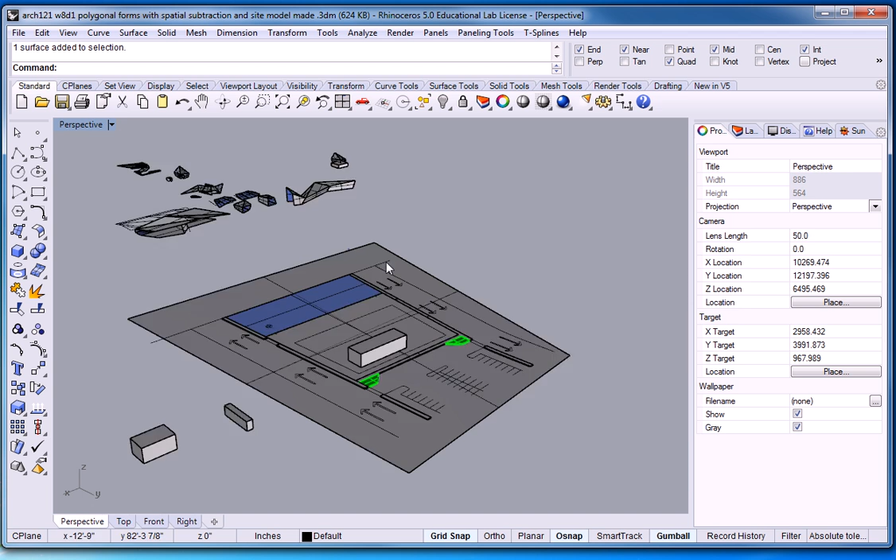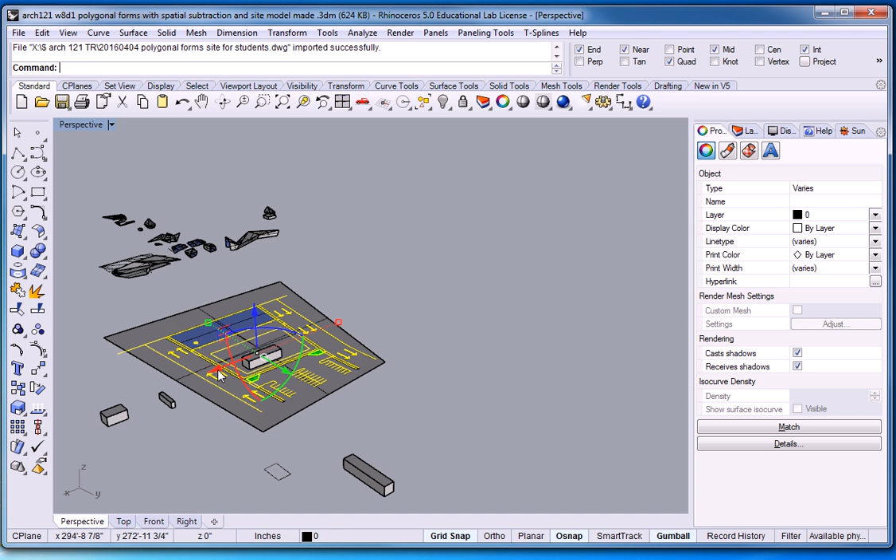So I'm going to click File, Import. And let me find this thing real quick. I believe I put it over here. Yep, there it is. So there's the site. It's already selected. So I'm going to move it back into here somewhere. All right, let me slide it back that way. I've got my grid snap turned on, so I know that I can move it evenly.

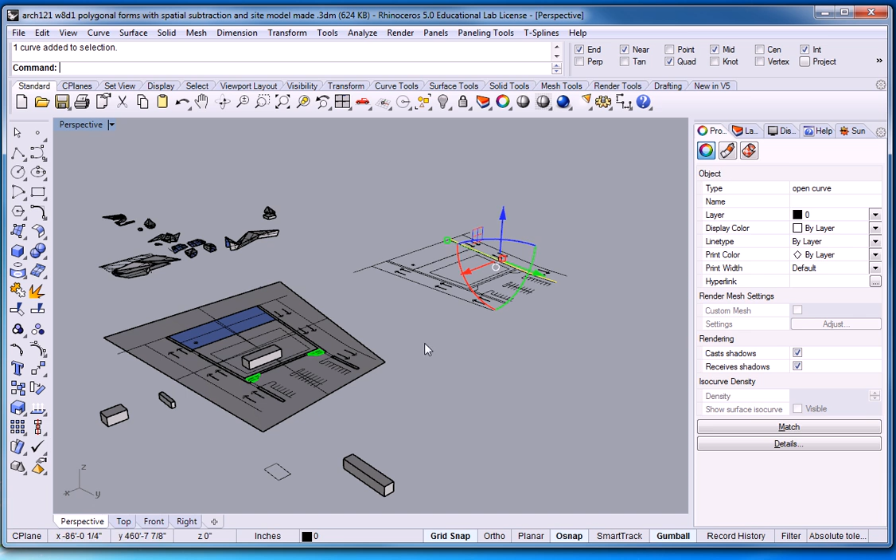One of the things that I wasn't real clear about the other day that I want to be clear about now is that all of this stuff right here is all going to end up on the zero layer. Unless there's some piece that wasn't on the zero layer when it was in AutoCAD, but I believe that everything in this thing should be on layer 0. And I could tell by highlighting it all and looking down here that it all is on layer 0.

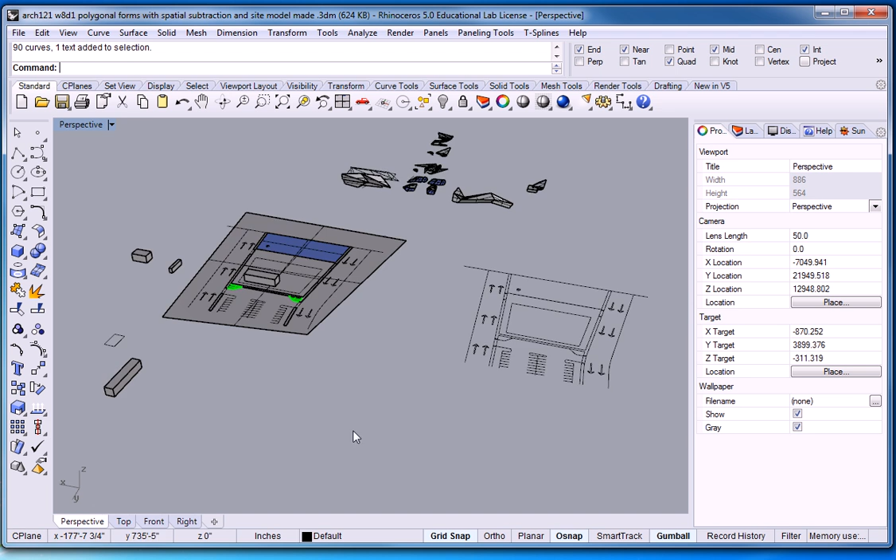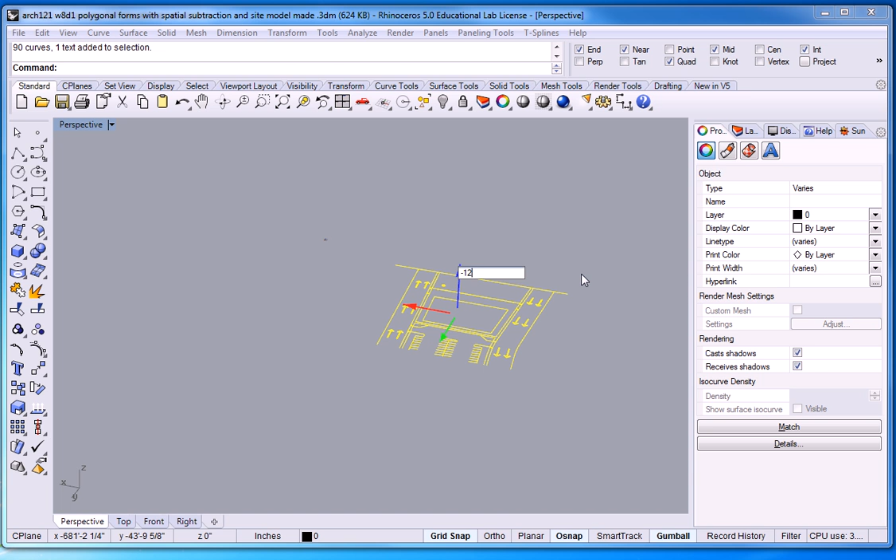So what I was mentioning to you is that the simplest way to do this might be to move it down a foot. So to clarify that, I'm going to hide all of this stuff, so we're just looking at that thing right there. So I'm going to select it all, click on that thing right there and say negative 12 inches or negative 1 foot, either one, and it moved down 1 foot.

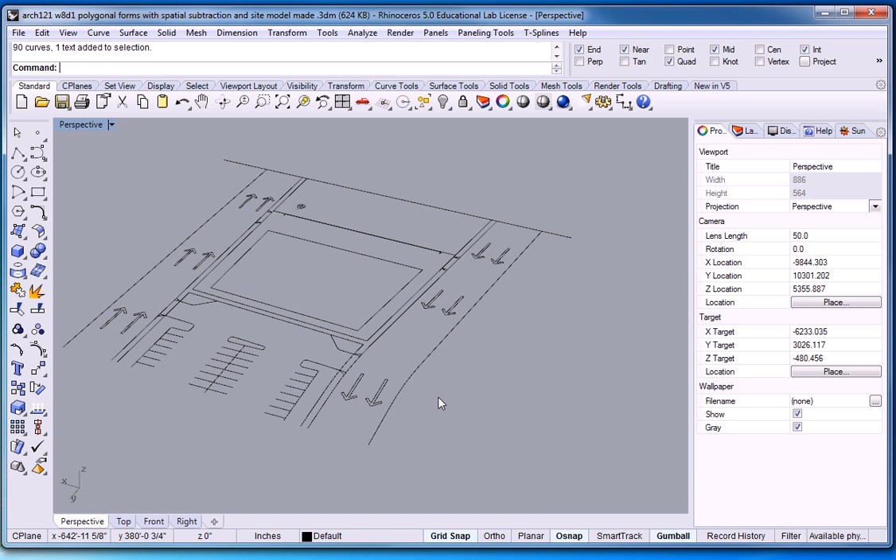Now, additional techniques that I wanted to cover for you on how to use geometry from another program, bring it into this program and use it, are going to include things like trying to use the actual line work. I walked in the back. Jonathan was having a hard time getting this curvature to work as an object. So here's one way that you might approach that.

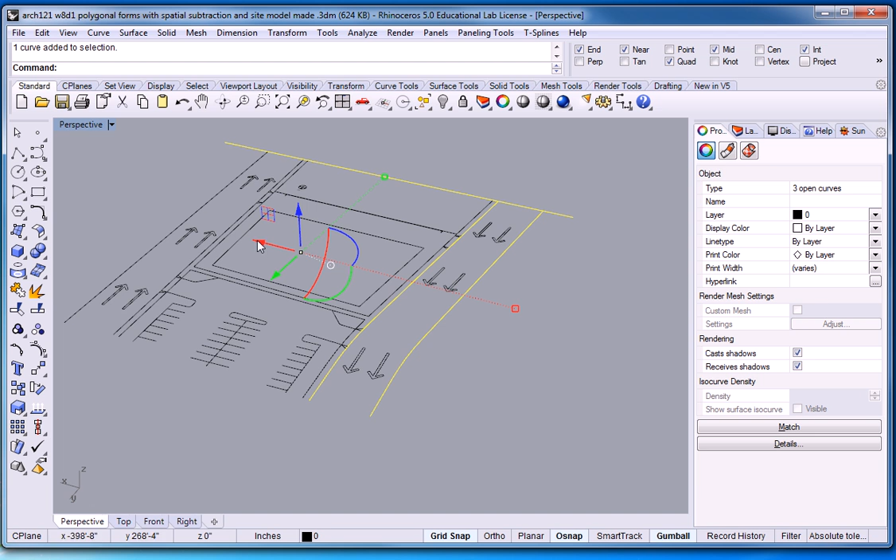You might try holding the Shift key and selecting the pieces that make up this perimeter. And then I'm going to actually just move it over a distance, and I don't know how far that's going to be, but I'm going to hold down the Alt key and click over here, and I'm going to type in negative 1,000 feet and see what happens. That might have been too far. Well, at any rate, I know that it's over 1,000, so if I do something there and I move it back, then I'm good to go, right?

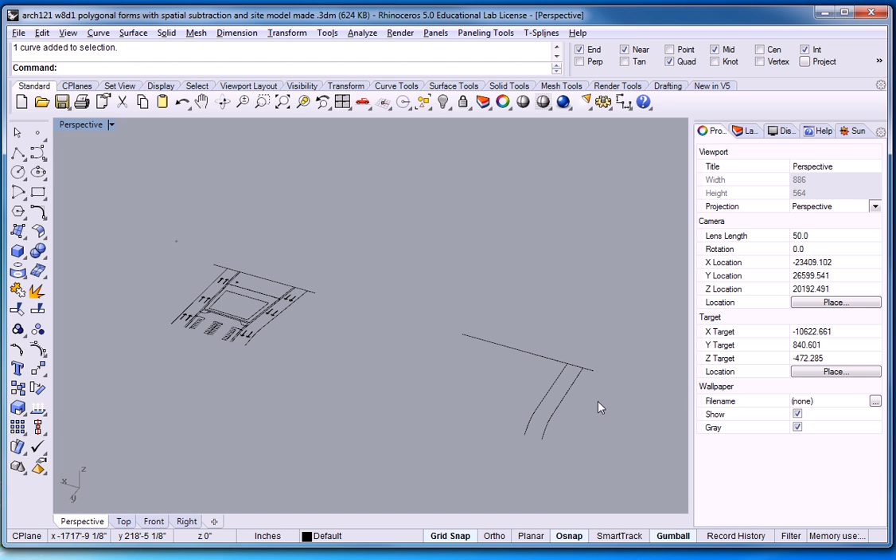All right, so what I'm going to do is trim up these lines right here so that they create a closed polygon. Okay, so let's give that a try. So trim that one and that one. Oops. So trim, select that one to cut with and that one to cut back to. Do the same thing on this side.

And now I've got to draw one line in here. So let me go ahead and create a line from the end point to the end point. Now I've got a closed perimeter there that I can make the street out of, right? So here goes. I'm going to join all of those.

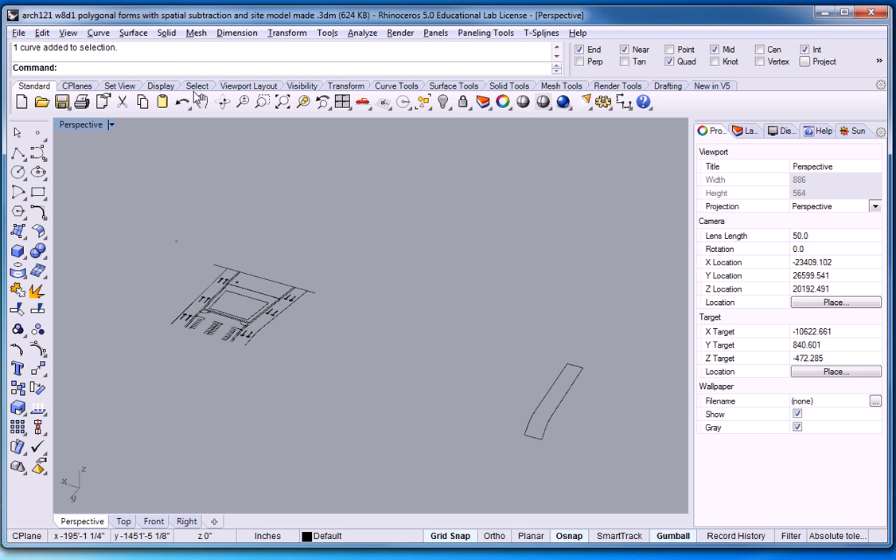So that's now one surface, and I can go up now as we did last class and go solid, solid, extrude, planar curve, straight. All right, press enter.

Now here's where the difference is. I've already taken this entire site and moved it down 1 foot. So I have to understand if something's going to go down or up. The streets are going to be 1 foot lower than the platform where I'm going to be working on my building. So if I go down... I'm going to make it real thick so you guys can see the difference. But I went down from there.

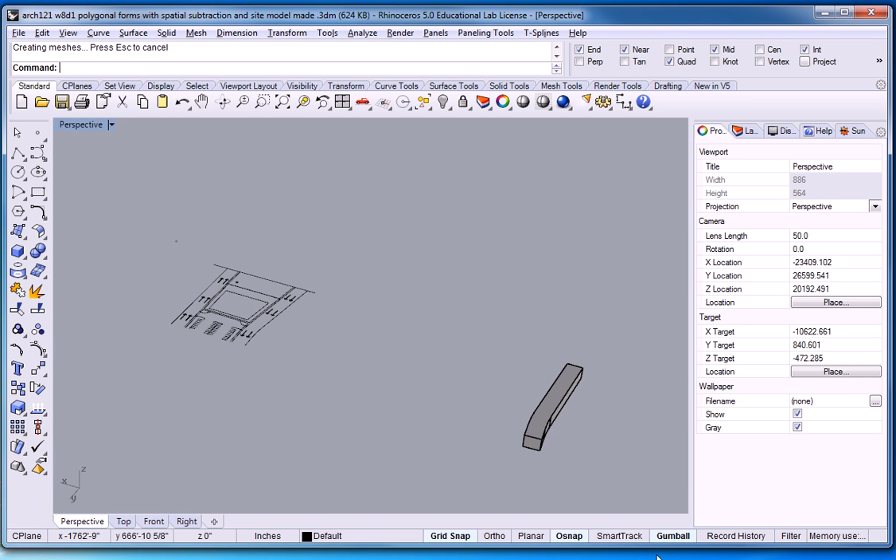So here's the question for all of you: in regards to the C-plane, where is this surface? Is it at the C-plane, above the C-plane, or below the C-plane? It's below the C-plane.

Okay, so the next thing that's really important, once you've created that stuff, you can delete the curves, we don't need it anymore, and take this object and put it on a layer. You've got to become disciplined about doing that type of stuff, otherwise you're going to end up with a mess that you can't control.

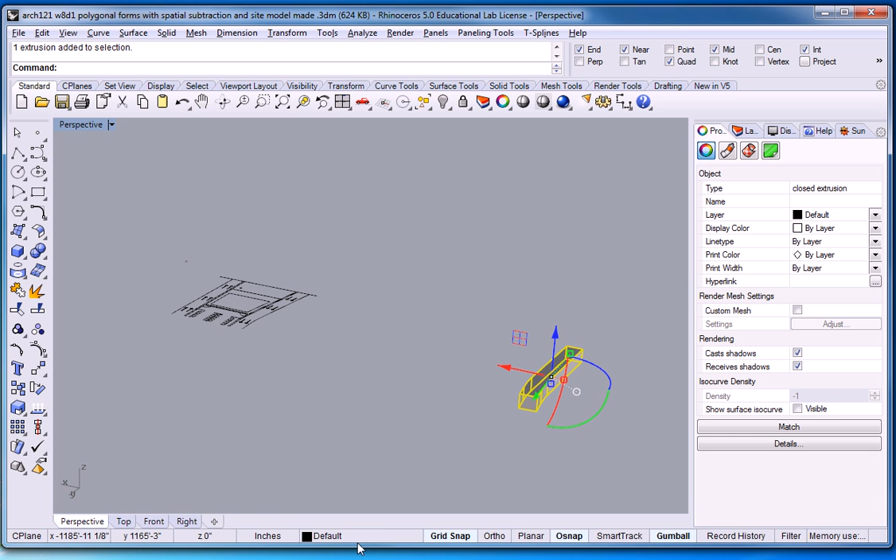So I'm going to come down here. I believe I have a layer for sidewalks and streets. And now that thing is on layer sidewalks and streets. I'm also going to change the color of it so that it becomes clear that it is different than the other things. So for now, I'm just going to make it blue or something.

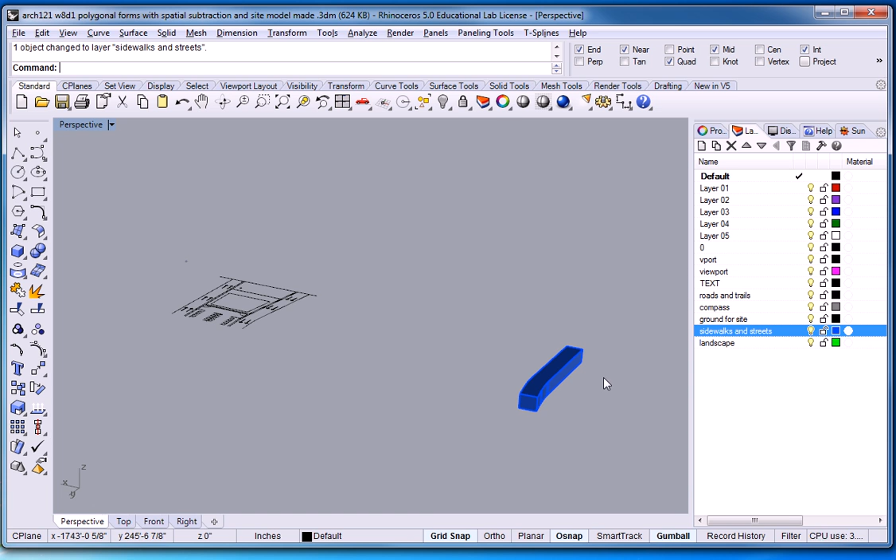So there is one of my big thick streets. But remember, the surface is down a foot. Okay, so I've got to do the other street, so I would do the same thing. The other street would go down. So I don't need to do that—you guys already know.

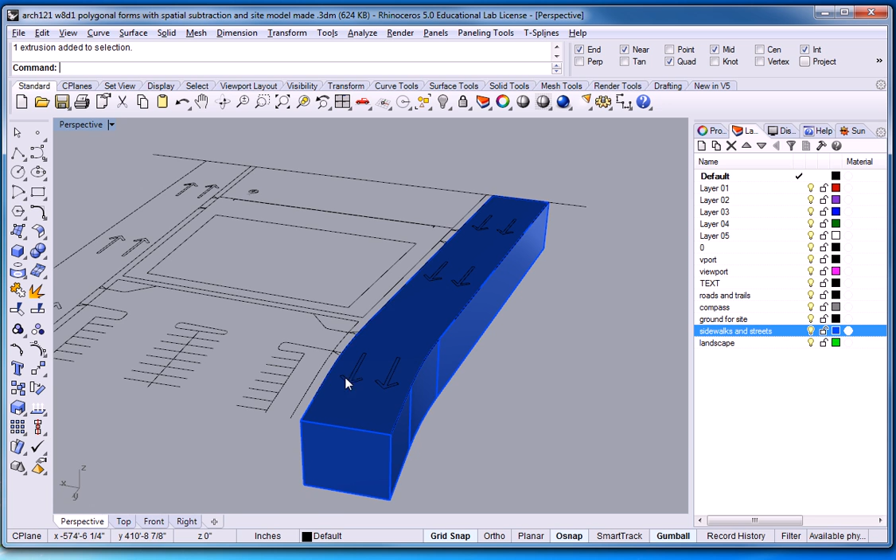So I'm going to take this and move it back 1,000 feet to where it's in the correct place. Right now, this is 1 foot down from the reference plane, from the surface, from the C-plane. The next thing I can do is take that thing and turn that layer off for right now.

Now I can start to grab more geometry from here and take it across and start to use it to extrude either upward or downward. Now, sidewalks—right now, all of this is 1 foot down from the reference plane.

So the sidewalks—when you guys are walking, like at your house, and you cross the street, you step off the curb down, walk across the street, and then step up onto the curb. So the curb, when I build these surfaces here, they're going to be up a foot. I'm going to make them 1 foot thick so that they come to the C-plane.

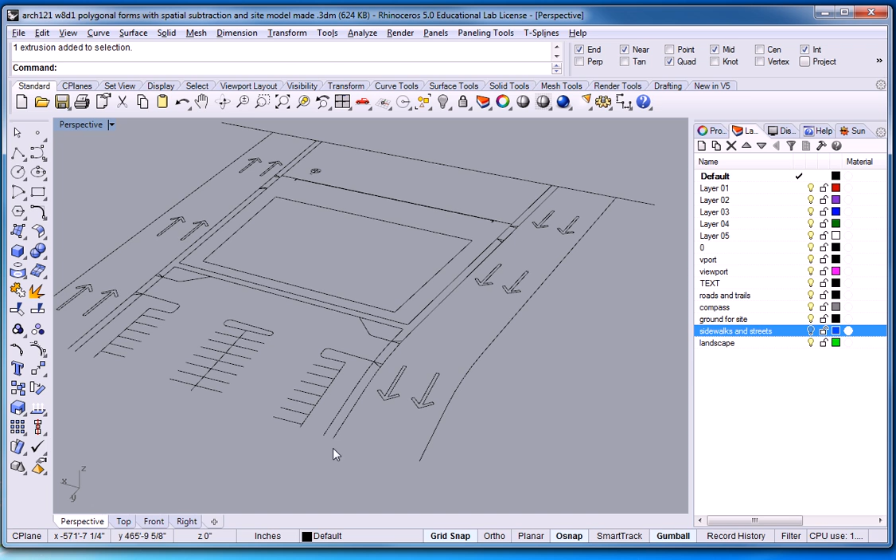Okay, so here goes. I'm going to, once again, hold down the Shift key, and I'm going to copy all of these pieces that I might need. And I'm going to do all the sidewalks at once. All right, click there.

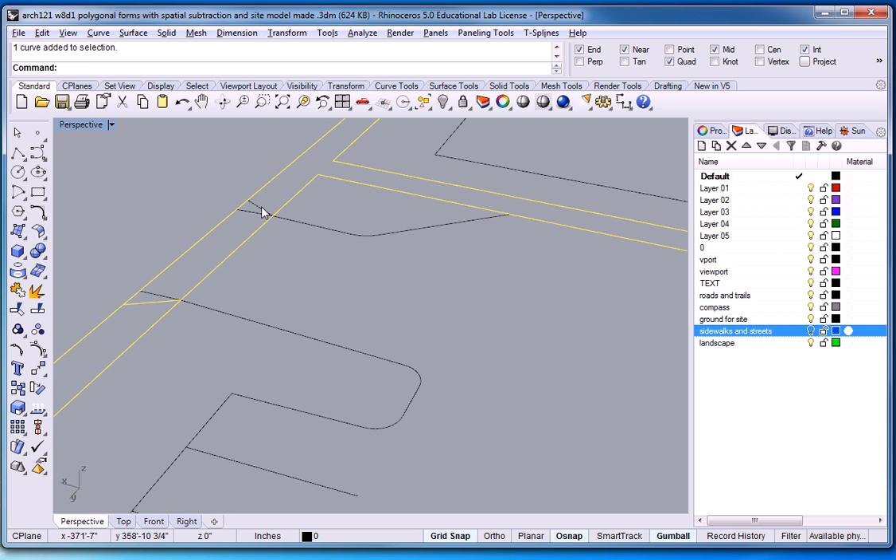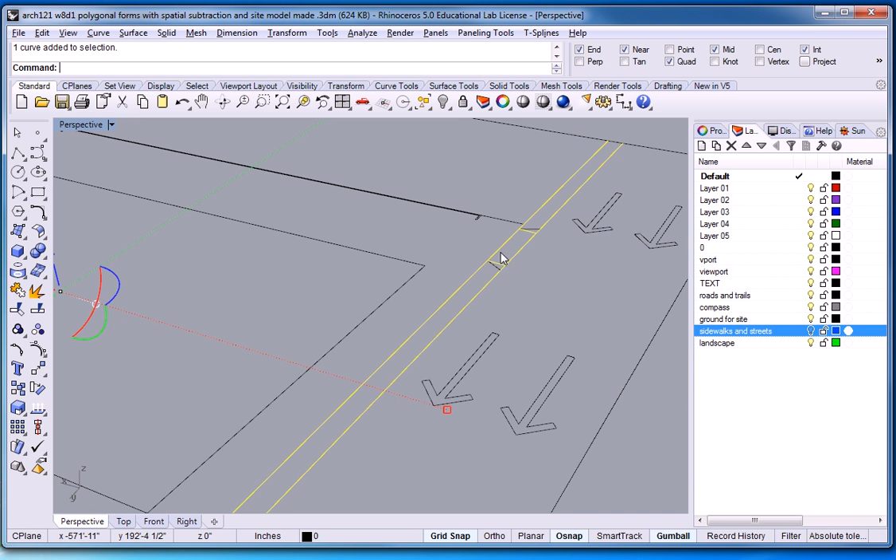Now, in addition to doing that, I'm also going to grab these pieces right here. I'm going to zoom in, and for these I'm going to grab the angled ones—actually, I'll grab the angled ones for all of them. I'm sorry, no, I won't. I'm just going to grab the angled ones here, and for these I'm going to grab the straight ones. You'll see why in just a moment.

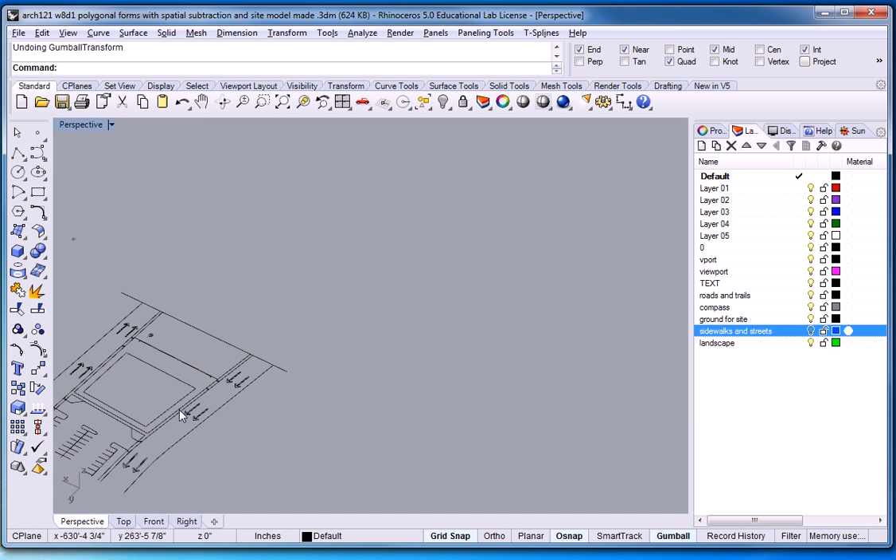So once again, I'm going to copy it over 1,000 feet. Oops, I didn't copy—Control Z. Hold down the Alt key and press that, type in 1,000 feet. Goes over. And now I have that geometry somewhere over here to work on. Oh, I went the wrong way—doesn't matter. So let's go ahead and clean up this geometry so that we can create a solid from it.

All right, I need to draw a couple lines. So I'm going to go from endpoint to endpoint. Another one from endpoint to endpoint. One over here.

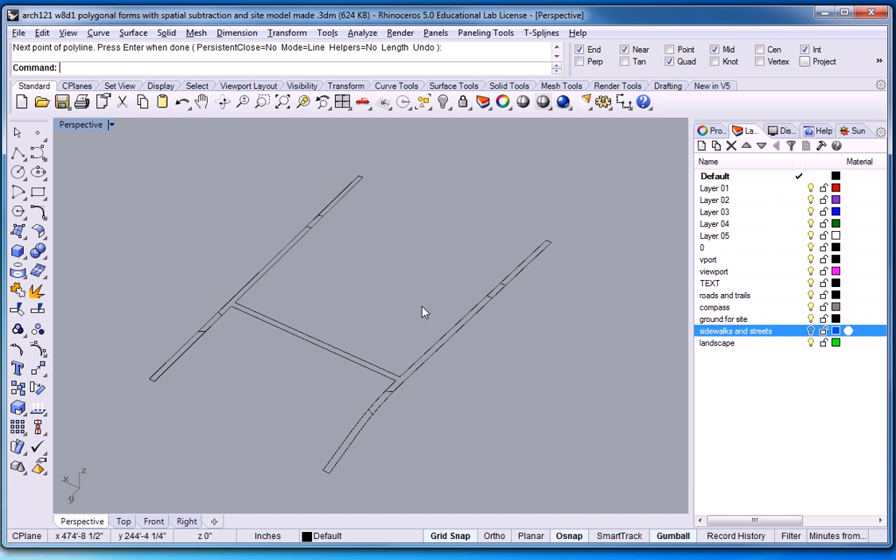So I don't want to build a solid here, or here, or here, or here. So I'm going to use the trim command and trim those lines out. Same thing over here.

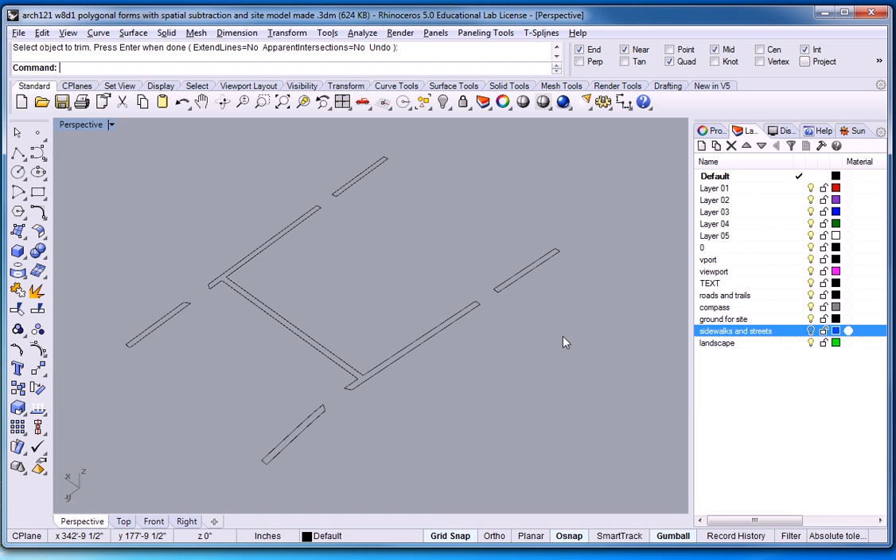So that is all of the pieces that I now need to extrude upward, 1 foot. Before I do, I'm going to try not joining them and see what happens with extrude planar curve. I think I'll end up getting a surface, but I'm not sure. Let me give it a try. I'm going to select all of this.

Come up here to surface or solid, extrude planar curve straight, and this time go up a foot. No, it's creating the entire thing. I think I am getting the top, but let me check. I don't know for sure.

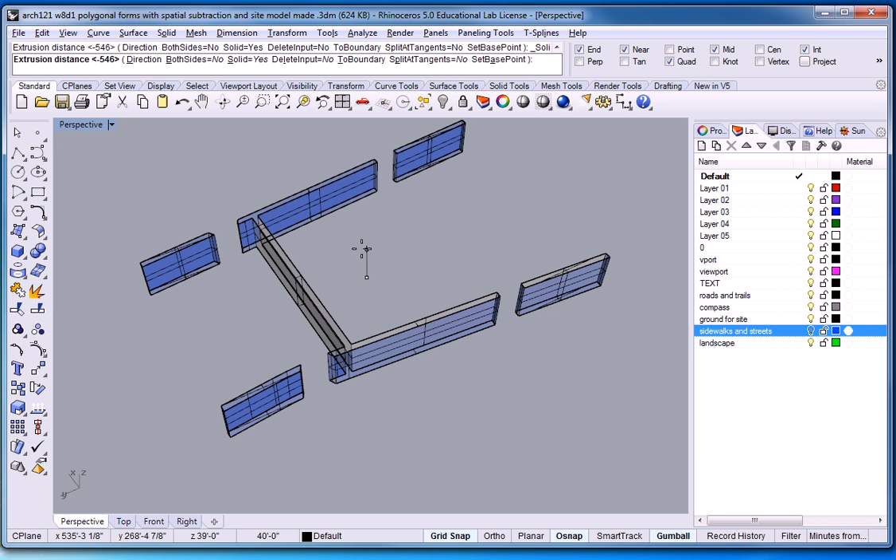Oh no, you're right, I'm not getting the top. Because you got to close it. No, I did get the solid.

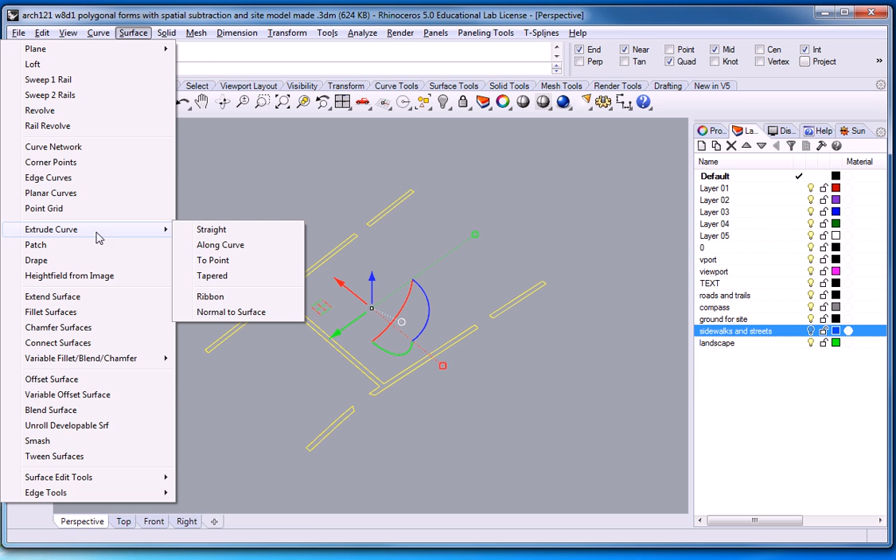Control Z. Let me explain why some of you are not getting the top on it. Instead of going to solid, extrude planar curve, you're using a different command - one from surface, extrude curve. If I use the wrong one, extrude curve, then there's a hole through the thing. See it? You can see inside of it.

So that's why some of you might be having an issue. But if you use solid, extrude planar curve straight, now I can go up 1 foot, so 12 inches vertically. And there are my sidewalks.

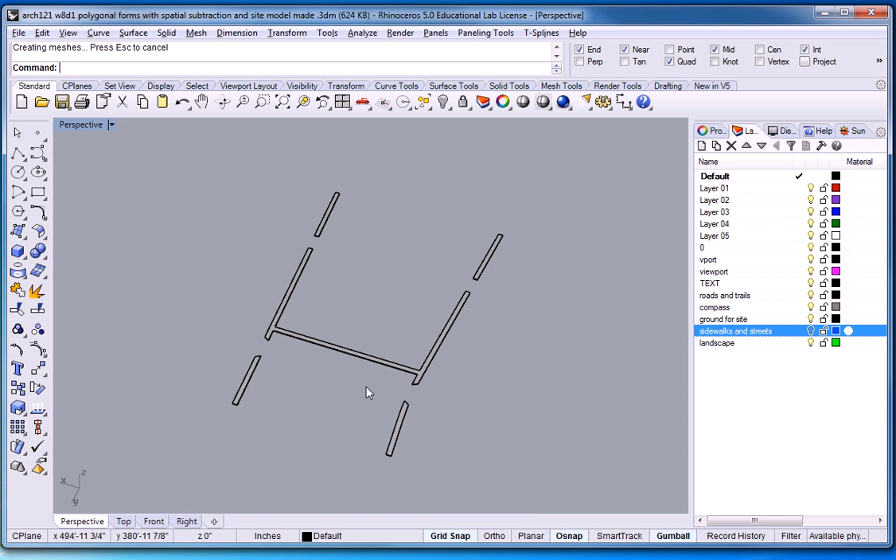I can take all of those pieces now and put them on the sidewalk layer. They're going to turn blue, or actually they're going to disappear when I do that because I've got that layer turned off. So here goes.

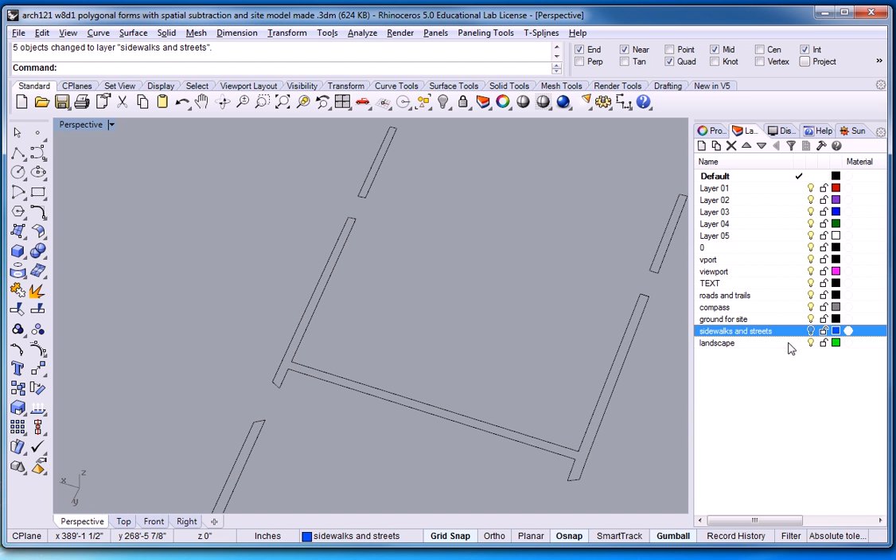Switch those to sidewalks and streets. They disappeared. Now if I turn it back on, I can see I've got one over here and one over here. So I'm going to go ahead, grab all of these and move them back.

Actually, I got to be careful because I've got lines there. I don't want to take the lines back, so I have lines on top of lines. It makes a mess. So I'm going to grab each of the pieces and send them back. This time it'll be negative 1,000 feet.

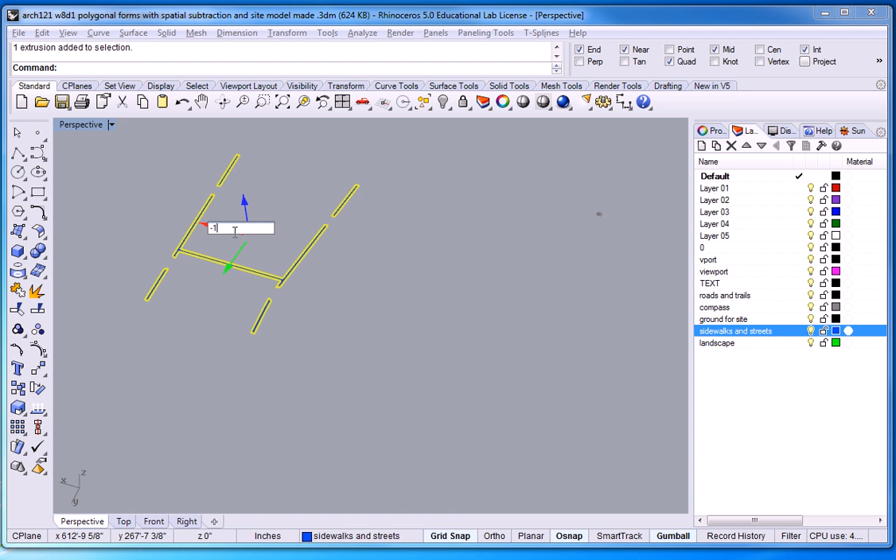I can get rid of these lines, I don't need them anymore. All right, so there are my sidewalks.

One of the things I might do is make my sidewalks a different color. So I'm going to put the sidewalks onto a different layer right now, just so that they're a different color and you can see them clearly. I'll move those over to - I think I'm gonna go to layer 2 because it's purple.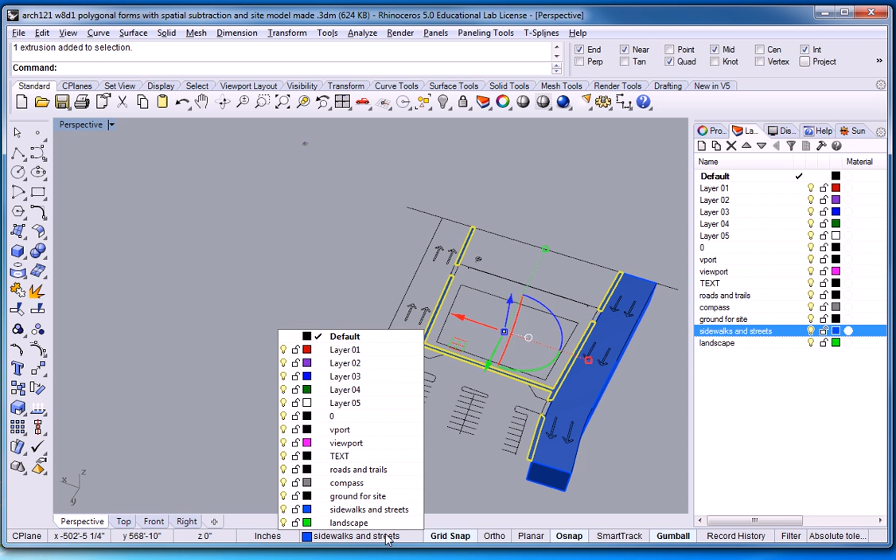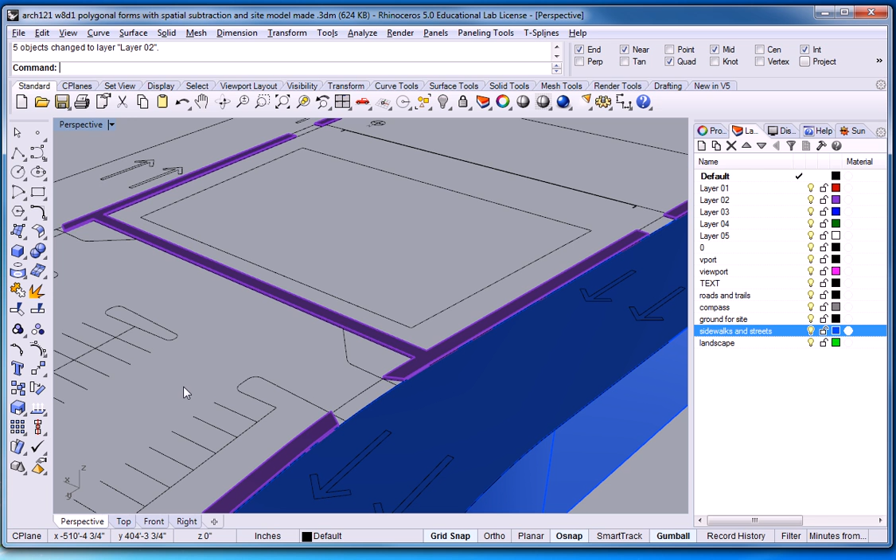It'll contrast. So some of you might be wondering, what do I do in these particular cases? In the case of the parking lot, the street and the parking lot are at the same level. So when you put a surface under here, that surface is basically going to extrude downward, and it'll look like the street and the sidewalk, the street and your parking area are all at the same elevation.

But over here, we have a little bit different story. Over here, we're going to do what's called an apron. We're going to create an apron that starts at the higher level and goes down to this level. So I'm going to set layer 2 as current and create that surface. It's going to go from the upper part here to the lower part here.

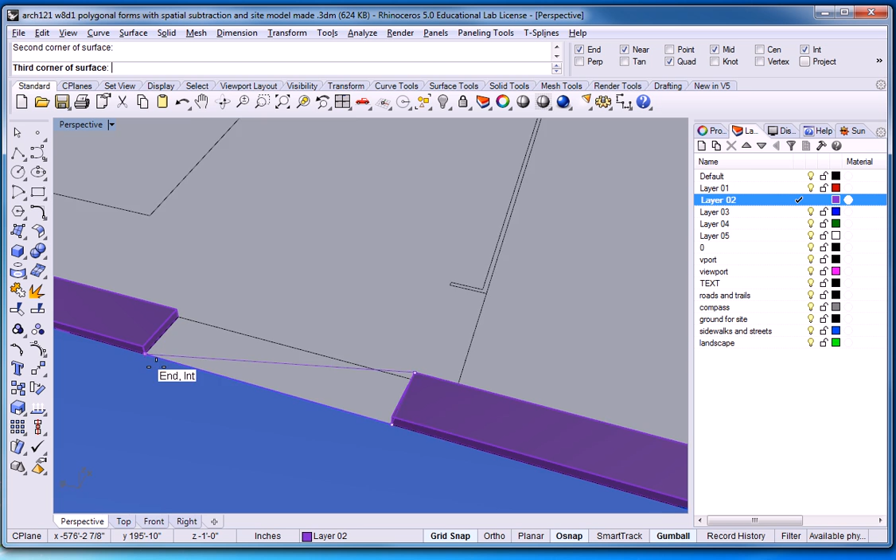I'm going to rotate to the other side. Oops, I screwed up, try it again. Sorry, here to here, and there is the driveway apron.

Really, if you've looked at your house, you'll have observed that there's like an angle here also, so that the car doesn't hit it real hard. But for the purposes of this little model, I don't care.

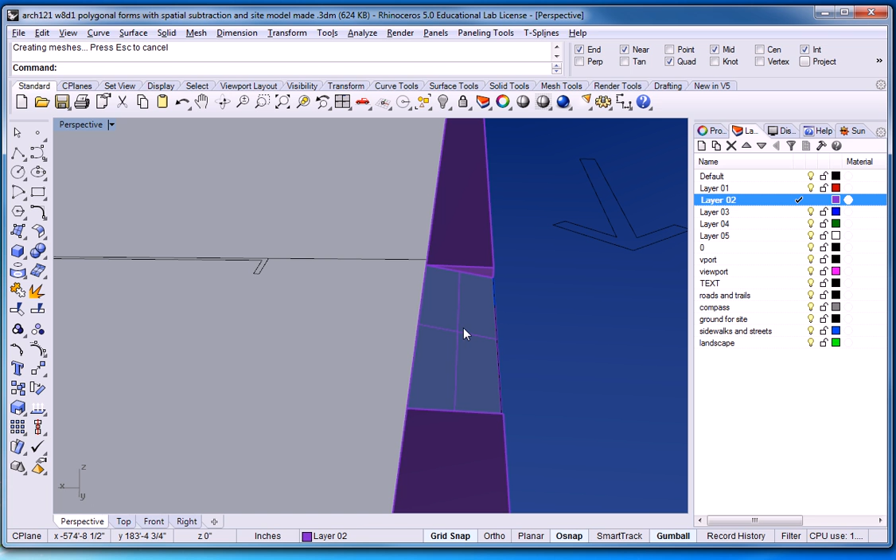There's a question, so I'm going to pause the video because I suspect it's gotten rather long. All right, so the question was, what did I use to create that surface? I used that tool right there.

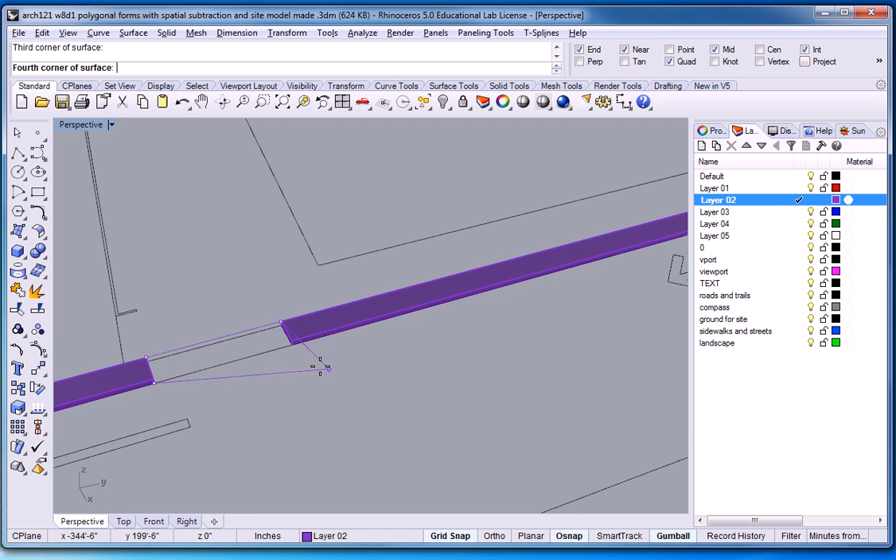Okay, so I'll do it one more time over here for you guys. So that tool, which is surface from 4 corner points - I start down at the street level and come up to my site level. Oh, and there's my surface.

Okay, so it looks a little bit different because I think it's basically flipped, so I just have to flip it around. But now, if I start just modeling stuff, I basically will be extruding my site upward.

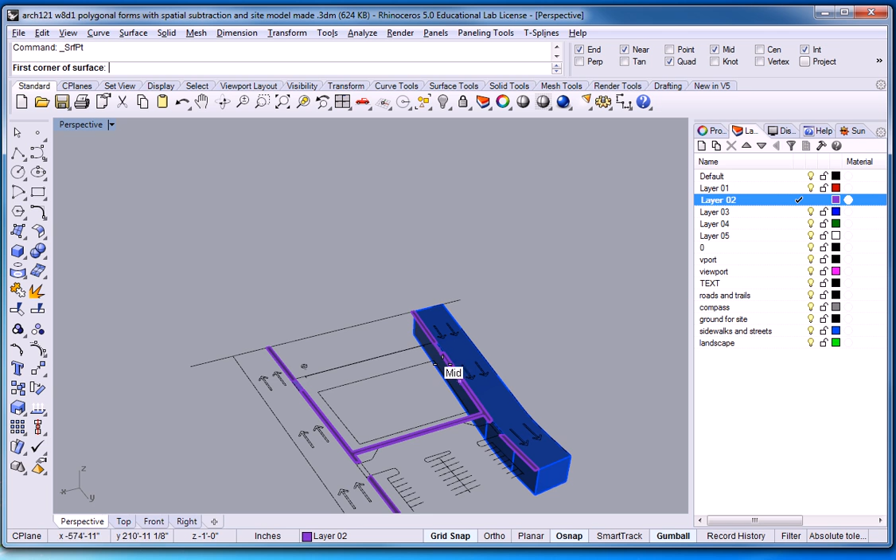So part of what I'm trying to get you guys to do is to kind of understand where the different things are. So hopefully this video kind of clarifies how you guys might go about working on your site. Okay.